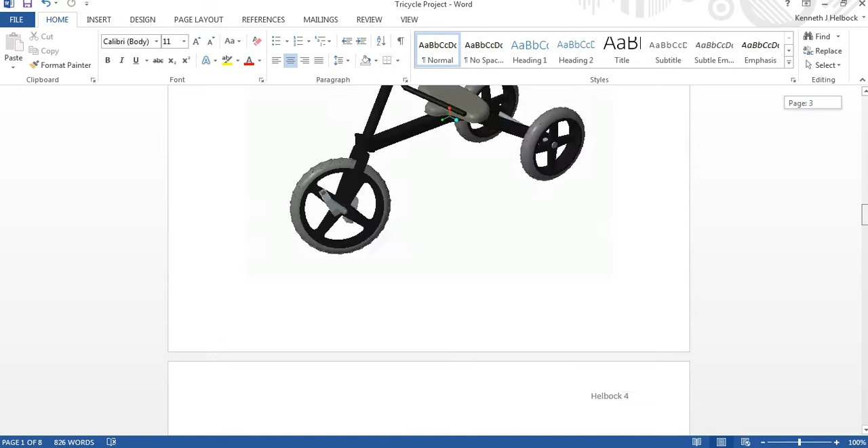Now here are a few pictures of my tricycle that I have. One I have in color with all black and gray for a stealthier look.

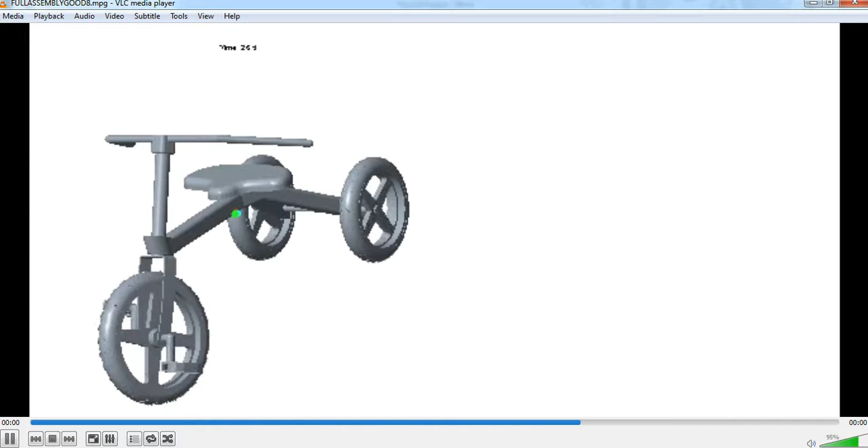And we can get to the simulation here, where everything moves together like a normal tricycle would if somebody was riding it. And that goes like that.

And then we get to the parts here. The back axle we use to put the back two rims on. I constrained the rims to this side piece right here and put end caps on the back axle to allow the tires to stay on.

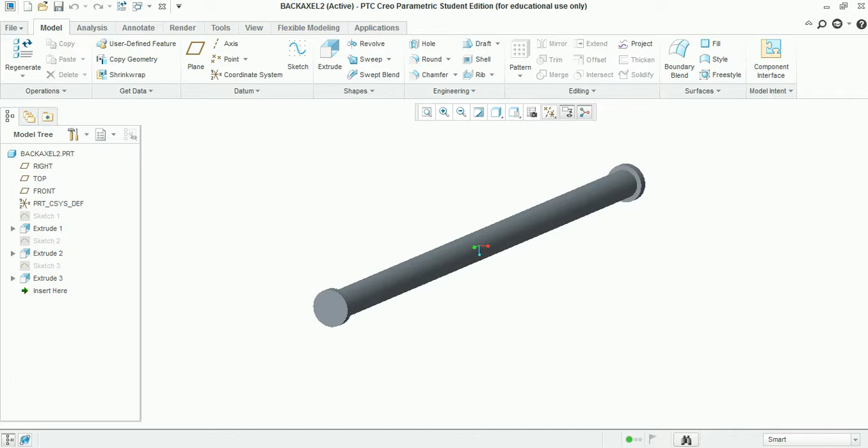Our next piece is the wheel, the rim. The wheel and the axle are a rigid fit because we want them moving in unison so that when the pedals are used, they will be directly rotating the wheel.

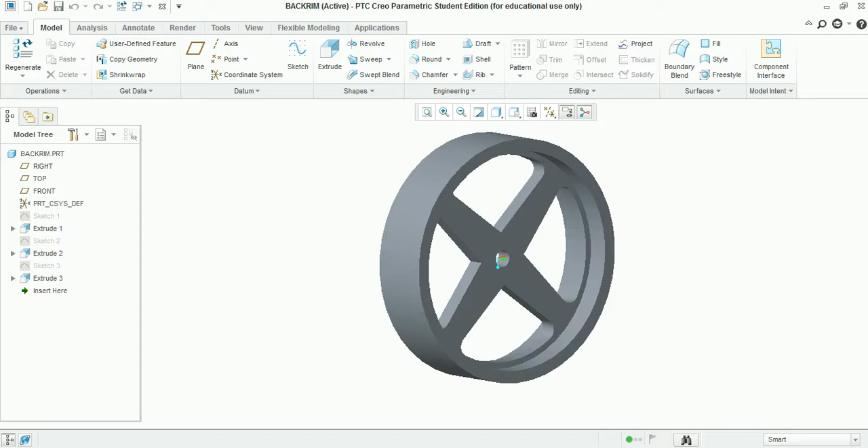And here is the bike seat. The bike seat would be made out of rubber, and it's a large bike seat to provide comfort to the rider.

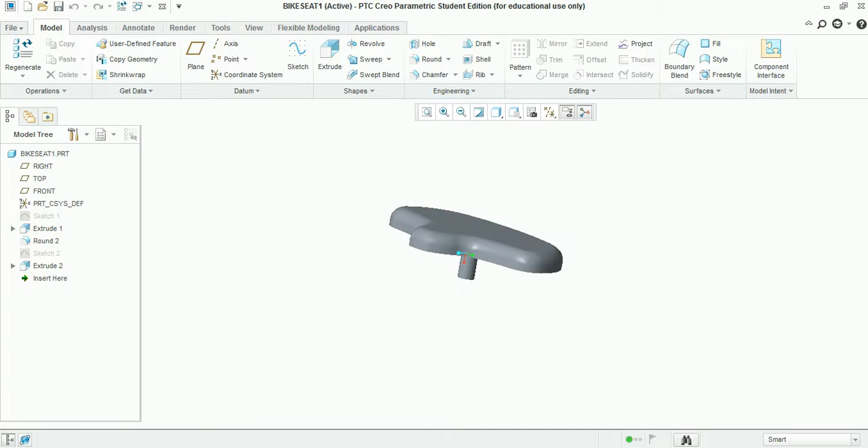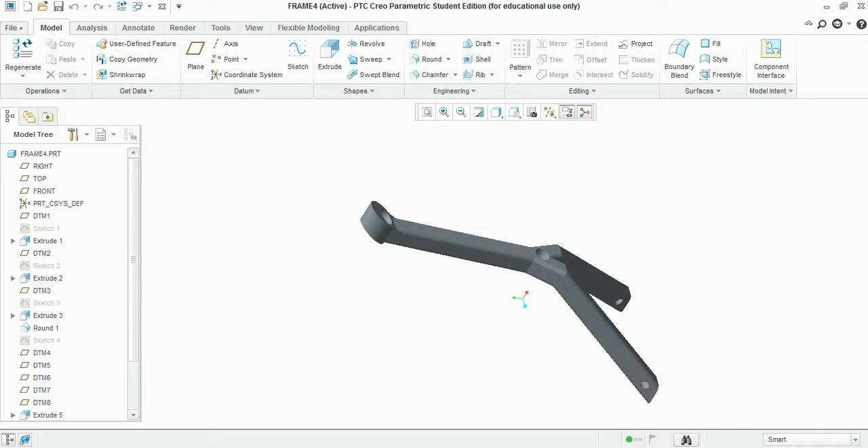Our next piece is the frame. This is the frame of the tricycle. We have a slanted hole here to put the front piece and handlebars on a slant that allows the handlebars to move farther towards the back of the bike so that the rider can sit farther back to provide that lowrider feeling.

And here's the hole where the bike seat would go. In the back we have the holes for the axle, the back axle.

Next piece we get to is the front bar for the pedals, which is a simple design where the pedals go right here and the rim goes right across here.

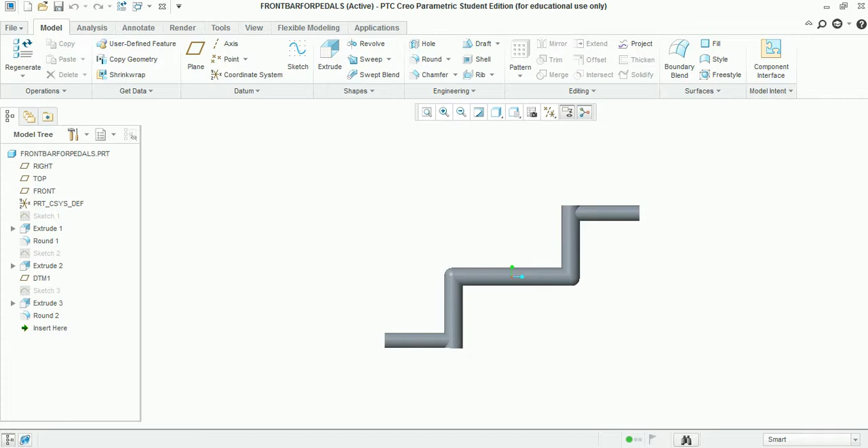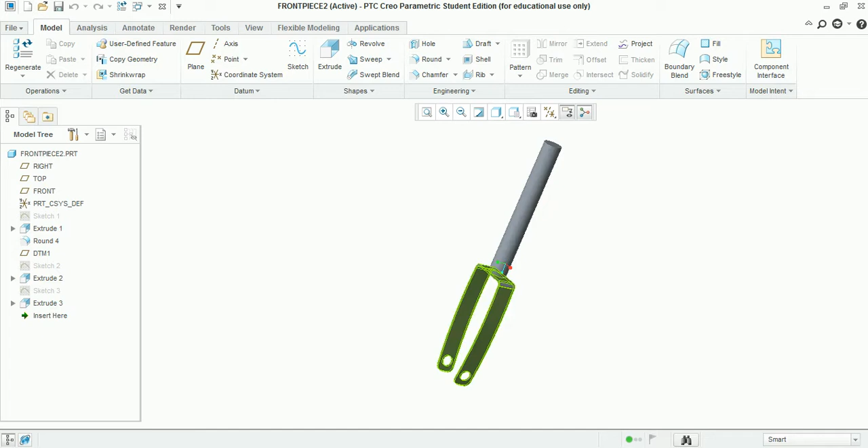Our next piece is the front piece, I called it. This front piece goes through the frame, the angled hole in the frame. Frame sits right on here, and the front bar axle sits in between these two holes right here along with the tire that allows clearance for the tire.

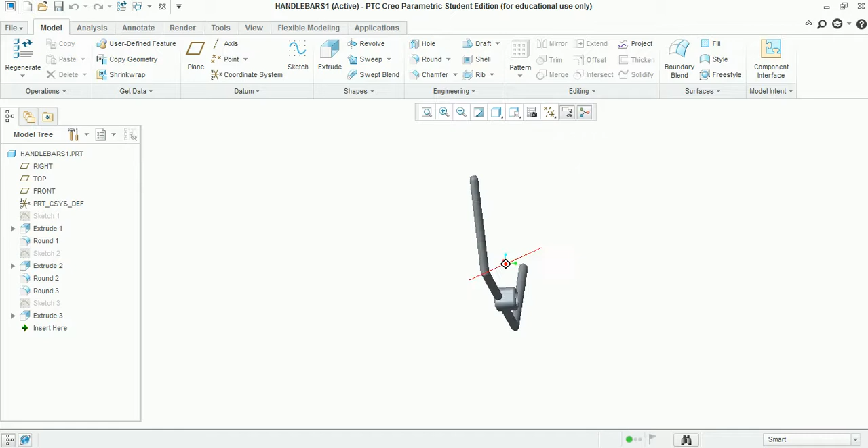After that piece we get to the handlebars. The handlebars sit on top of the front piece. A simple design for the tricycle to allow creating a lowrider feeling.

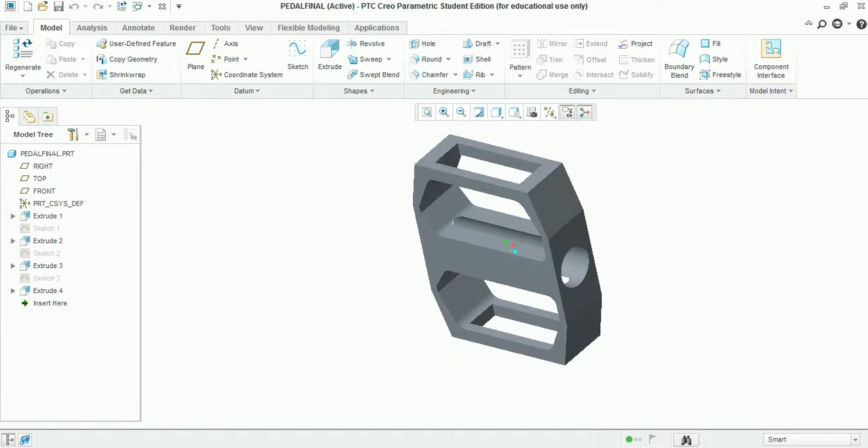Next, we get to the pedal. The pedal, I feel, is a good design that we created. The pedals and the axle were assembled in a loose fit that allowed the pedals to rotate 360 degrees, while the hole in the pedal, right here, was constrained to the bar on the axle. I cut out some of the material to decrease the price and keep it lightweight. The pedal would be made out of plastic.

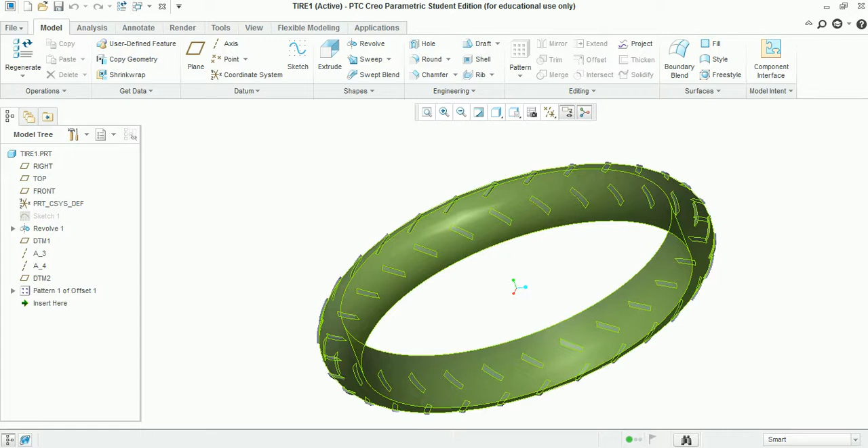Our next piece is the rim. We used this rim on the front tire and two smaller rims of the same design on the back two tires. They all have treads on them all the way around the wheel.

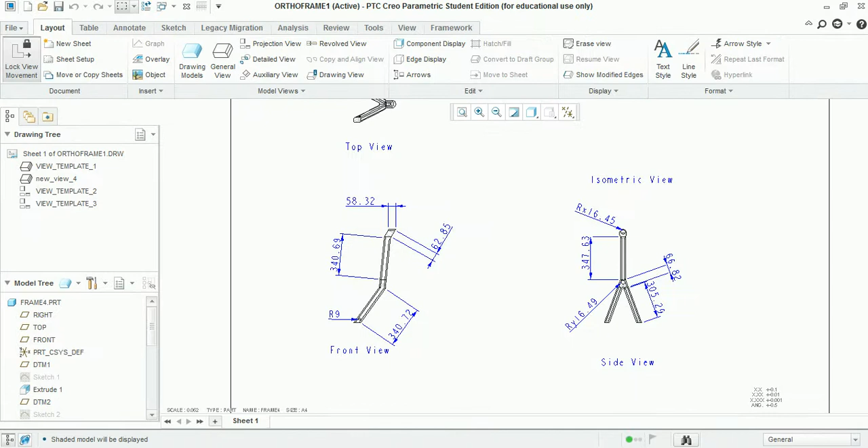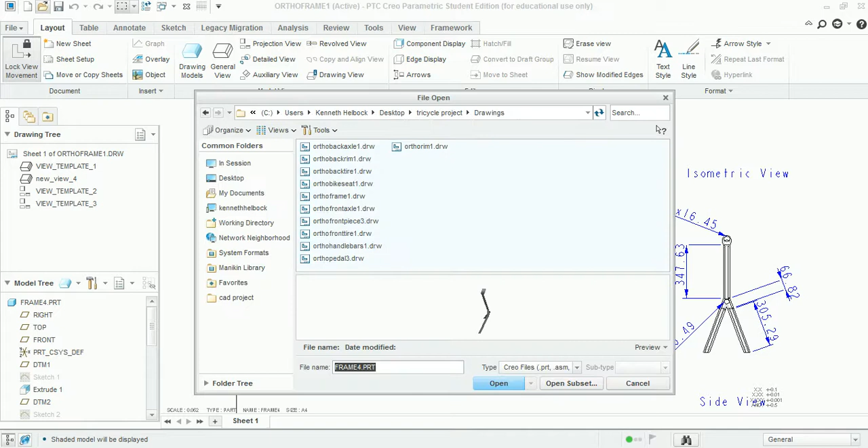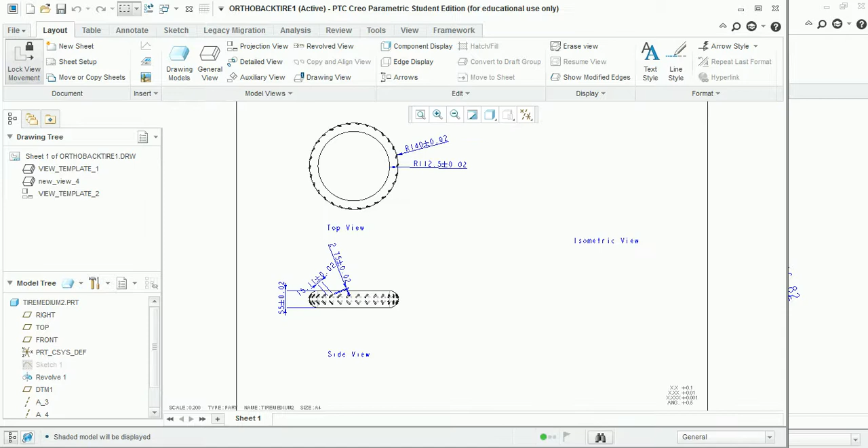Next I want to show you the orthographic design, the orthographic drawing, where we have all the measurements. And I can pull up another one. And I need to pull up another one here. So here's another one with all of the tolerances that we included.

This is an orthographic design drawing of the back tire. Okay, I think that is all. That's all our parts. Thank you very much.